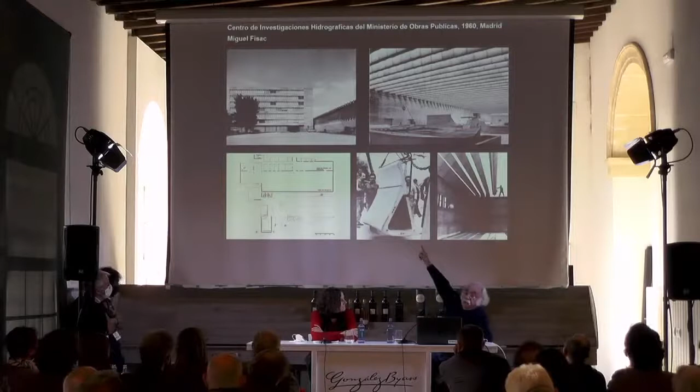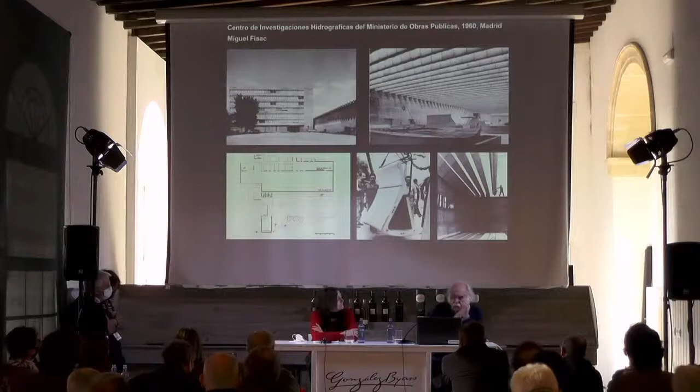Un paso más y Freyssinet descubre el hormigón pretensado. No traigo ninguna obra de Freyssinet, están entre las 100, pero sí esta, que también está entre las 100: el Centro de Investigaciones Hidrográficas en Madrid, de Miguel Fisac. Es interesante ver cómo la pieza clave es esta, una pieza única que resuelve todas las necesidades constructivas, diseñada de tal manera que puestas una al lado de otra, con el postensado posterior, permiten resolver las grandes luces y lograr ese espacio con esa iluminación tan ajustada, tan facilitadora del centro de trabajo que es ese espacio. El hormigón al servicio de las necesidades previamente planteadas.

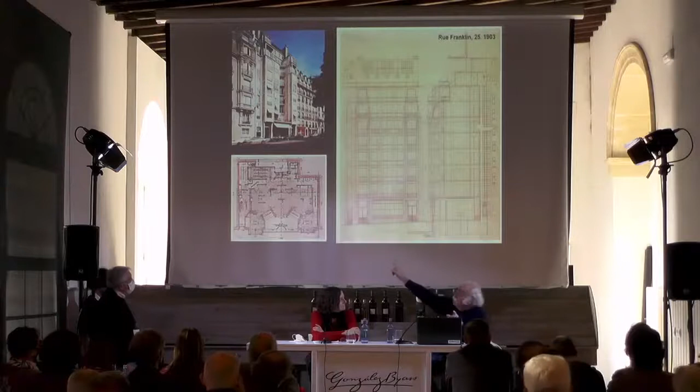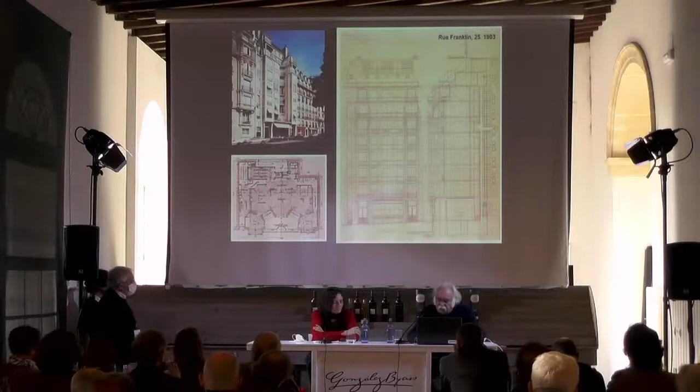Esto es muy conocido. Para quienes no estén familiarizados, esta pequeña casa de apenas 11-12 metros de fachada, en la calle Franklin en París, es el punto de arranque de toda la arquitectura de hormigón que, con cabeza y sentido, sin imitar las construcciones en piedra, plantea una edificación donde hasta ese momento se construía con muros de carga. Aquí se resuelve una estructura en la que se ve cómo en la planta aparecen los pilares nítidamente marcados, lo cual posibilita una distribución muy libre, de modo que se puede ajustar con muy pocas dificultades el funcionamiento interior, ya que todo ha quedado reducido a unos soportes. Y lo que es tan interesante, el hormigón permite cambiar por completo las fachadas. Fijaros en las casas de al lado, cuánta diferencia hay con la que se construye nuevamente, y permite también modificar la sección. Es decir, la estructura de hormigón ha permitido de un solo golpe modificar la planta del edificio, su fachada y su sección, dando lugar a las famosas cubiertas planas y ajardinadas, que después serían un elemento clave en la arquitectura de Le Corbusier.

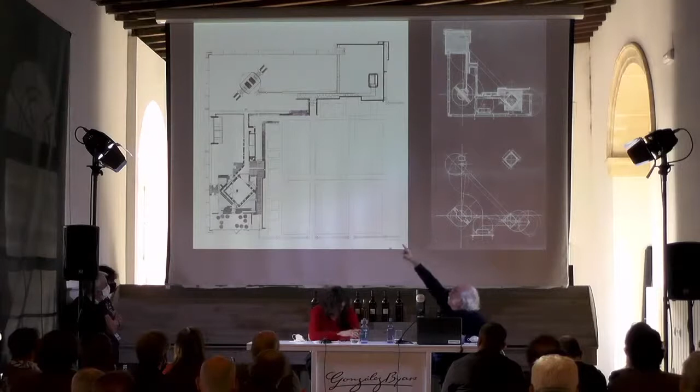Donde Carlo Scarpa crea esta parte de aquí, es el cementerio del pueblo, y aquella otra parte es todo lo que es el complejo sepulcral de la familia Brión, con tres partes importantes: allá arriba una capilla de meditación, lo que veis en el ángulo, las tumbas de los Brión, y aquí abajo del todo la capilla.

Pongo la imagen de la derecha para demostrar fehacientemente cómo toda la construcción está sujeta a unos módulos muy estrictos. La geometría como elemento capaz de unificar toda esa gran extensión de casi 2.000 metros cuadrados.

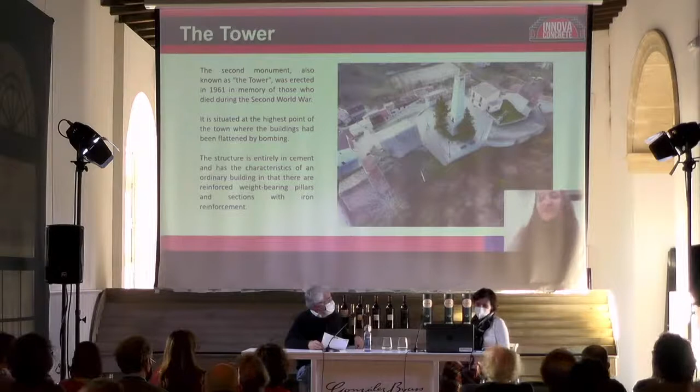Given that we also had the possibility to interview the nephew of Walter Sibona, the architect who decided to construct the tower, we had the chance to exchange opinions and views, as well as some stories, such as the one that, thanks to the InnovaConcrete project, some missing documents on the tower's construction were found again.

We had an exhibition in Torricella Peligna two years ago in summer, and the nephew came to visit. In the end, he thought he had these missing documents, which were retrieved and given to the state archive to be archived. So this is also one of our achievements, thanks to the interviews and the activities that have been performed in Torricella Peligna.

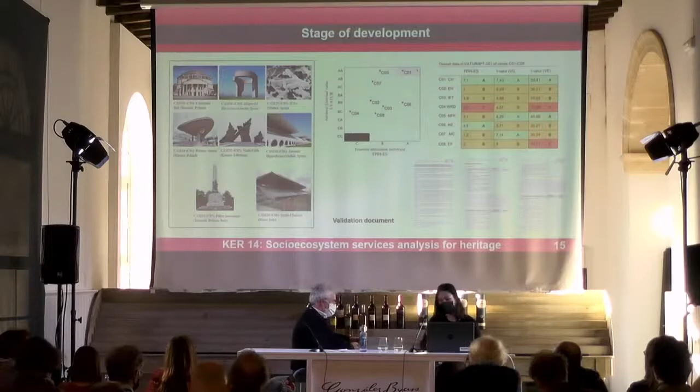The main results obtained throughout the project are: the socio-economic study of social perception I mentioned before; the theoretical and practical approach to tourism evaluation of cultural heritage based on ecosystem services; the design of the evaluation tool integrated in the DMT platform; the IP registration of the tool; the application of the tool in the 8 study cases and also other cases in the province of Cádiz; the elaboration of my PhD thesis with international mention; the constitution of H&W Consulting, the spin-off from University of Cádiz within the InnovaConcrete project; and the publication of 4 scientific articles and 6 communications to specialized congresses. In this slide you can see some of these publications.

Upcoming activities, going very fast: validation of the tool is necessary to carry out in more case studies for updating and monitoring; the transformation of H&W Consulting into a spin-off; the creation of an app with the tool for easier application; and a dissemination campaign in public and private institutions.

And in conclusion, the measures to undertake after the end of the project, currently under study, is the presentation to Navantia of the application of our method in the LDK Museum here in the province of Cádiz, a very nice place.

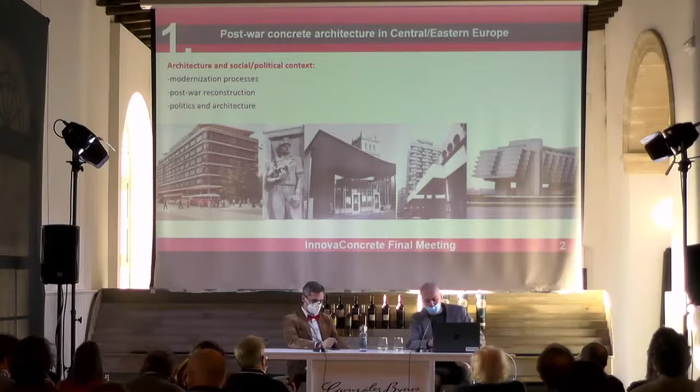As you can see, in different periods, because those buildings represent different decades, concrete as a material could be part of modern structures, very modernist, avant-garde structures, but also something more classical, like this socialist realistic sculpture of the miner during the Stalinist period.

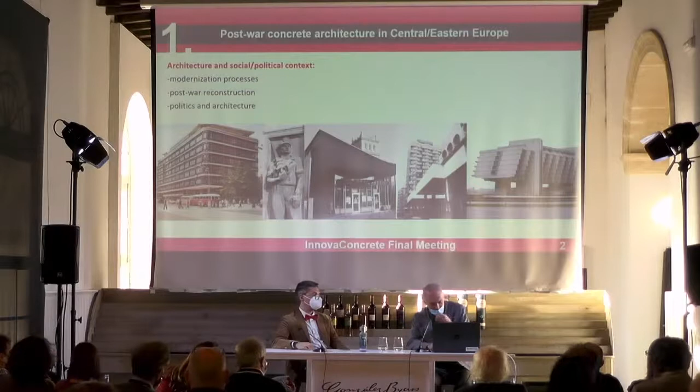And then we analyzed different types of structures, different types of construction. Of course, our survey was based on the research Docomomo has made, with our small help.

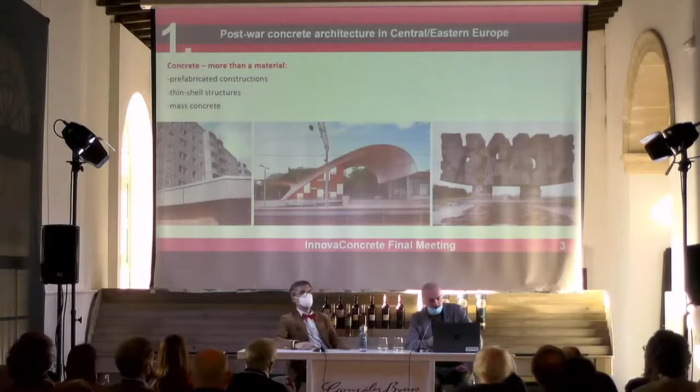And we figured out that something which is very typical for the subject we are dealing with are multifamily housing with the use of prefabricated constructions as this tool for modernization. Same with thin shell structures, which are quite important as a sign of modernity in Central and Eastern Europe in the late 50s and 60s, and mass concrete here as an example of a monument dedicated to the victims of World War II and the Holocaust.

So we limited our focus to the thin shell reinforced concrete structures. And of course this is nothing new, we know this type of construction for example from the Zarzuela Hippodrome and from the interwar period.

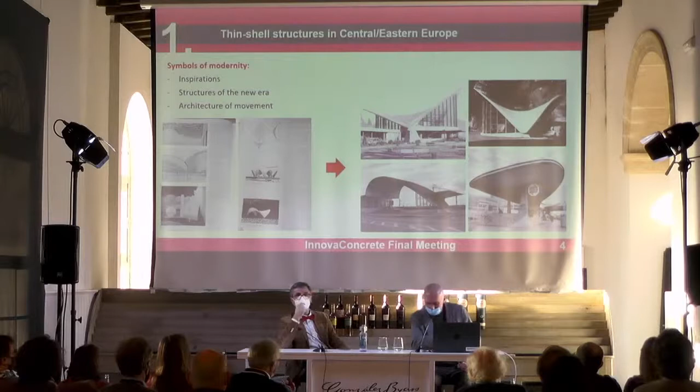Polish architects in the 50s, or Soviet architects or Lithuanian architects, were really aware of what was being made behind the Iron Curtain, because this curtain was not so strong as it seemed. So you can see press or architectural journals from the 60s, and then implementation into real-life structures.

And those dynamic reinforced concrete shells were often used in architecture of movement, as this dynamics and this concept of overwhelming the laws of nature was somehow connected, as an idea, with speed, with movement.

And we decided that quite important and interesting assets are the commuter line railway stations in Warsaw, designed by a pair of architects in the mid-50s, but then, because of political reasons, they weren't allowed to build this type of avant-garde construction.

So they had to wait a few years, and finally in 1963 they completed the series of 6 small pavilions with the same idea but different shapes. And finally we have chosen 2 of them.

One was the InnovaConcrete case study, another one was our case study. It was Warsaw Ochota Station, with this thin-shell structure in the shape of a hyperbolic paraboloid, raised in the early 60s and used with its primary functional program till now.